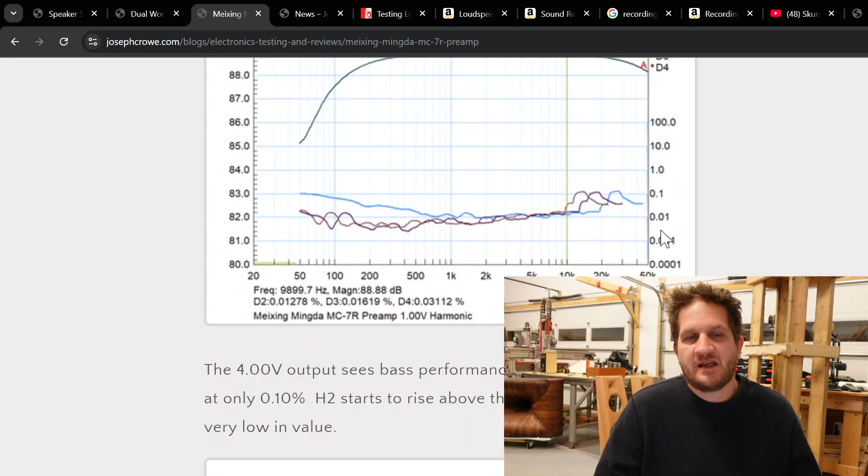And so the recent blog post that I had done was on the Meixing Mingda MC-7R preamp. And so if you scroll through the measurements, you'll note that there really isn't any predominant second order harmonic distortion until you get into the higher outputs, where you see that coming in with the bass frequencies. But generally, this amplifier is a very low distortion, very clean preamplifier, and it doesn't add any of that tube warmth from what I observed with the listening impressions.

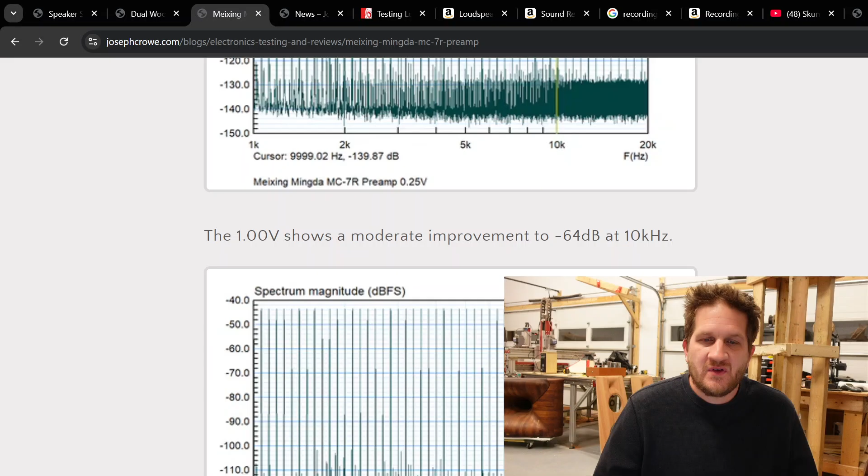Now in this blog post, if you scroll down, you can see where I actually directly compared the distortion measurements with the Don Sachs preamp. And so this is a preamplifier where you actually do get a nice tube warmth added into the sound. And so to correlate that with the measurement side, this is the distortion profile of the Don Sachs preamp, and this is what I refer to as the ladder effect, where you have H2 and then H3 and then H4 as a stepping ladder, where subsequently the distortion is lower and lower as you go into the higher order harmonics.

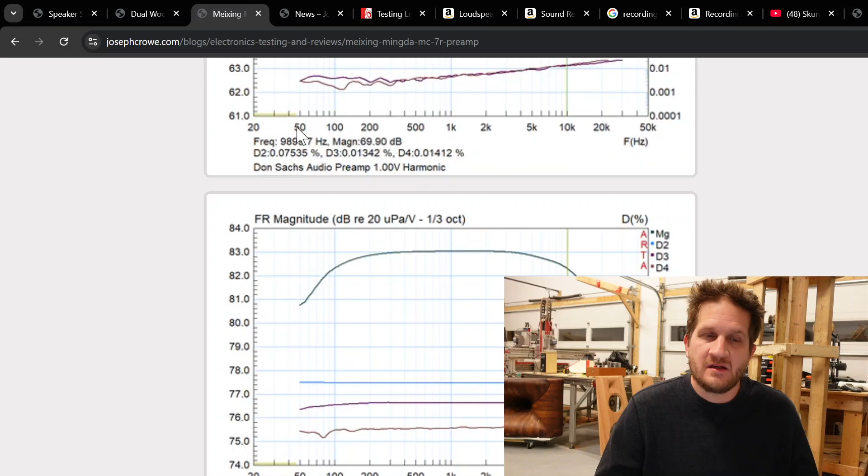Now this is an example of an electronic device that has that particular distortion characteristic, but it also holds true from my observation with loudspeakers as well. With driver testing, I've found that drivers that exhibit this characteristic also sound preferable. They have a nice, warm, rich sound, where it doesn't detract from clarity either. So often the concern is that when you introduce distortion, you're affecting clarity. It's been my observation that when you're focusing on this ladder effect, where you have the H2 predominant, then clarity does not suffer in any way. It actually ties the music together and has a much more musical sound character.

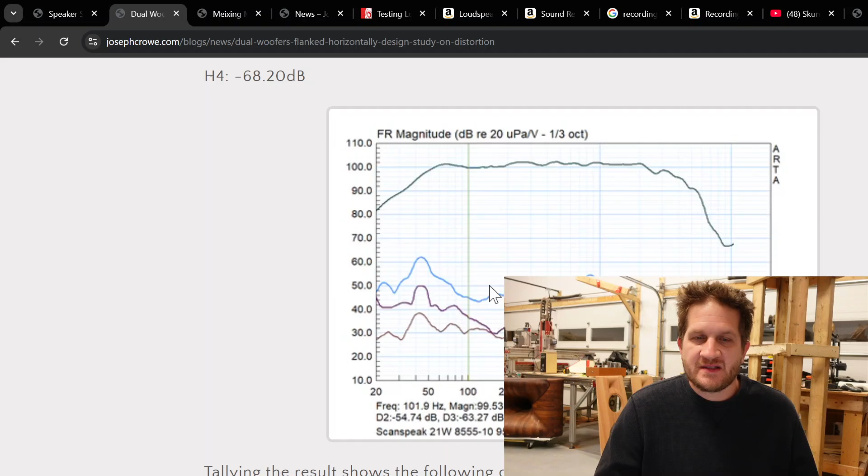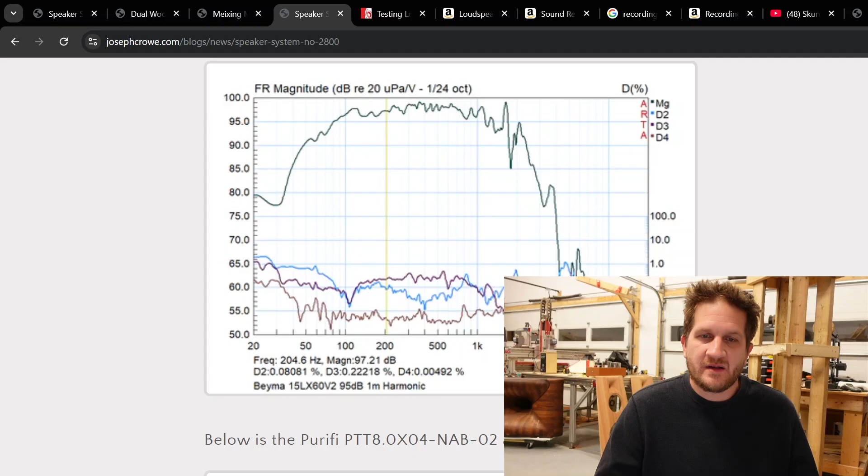To follow the line of thought with the speaker driver testing, you can see here in this particular blog post where I had done the dual flanked woofers, you'll notice again that it has the same ladder effect. And this is with the ScanSpeak woofer that has the symmetrical drive 1 motor technology, the SD1 motor technology. And you can see here again the same attribute. To further emphasize that, in the blog post with the measurements of the dual CS woofers, if you scroll down to the bottom again, you have that ladder effect in the distortion profile. So you can see that here as well.

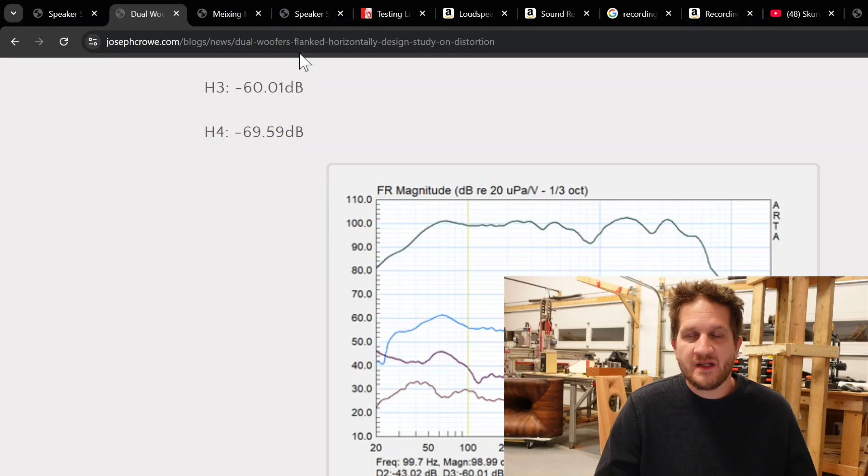So that's covering that question. Now I wanted to go back and discuss, when we did the live last, we were talking about various books that I've read and use, that have influenced me as far as my understanding and knowledge. And so I'm going to touch on that a bit as well.

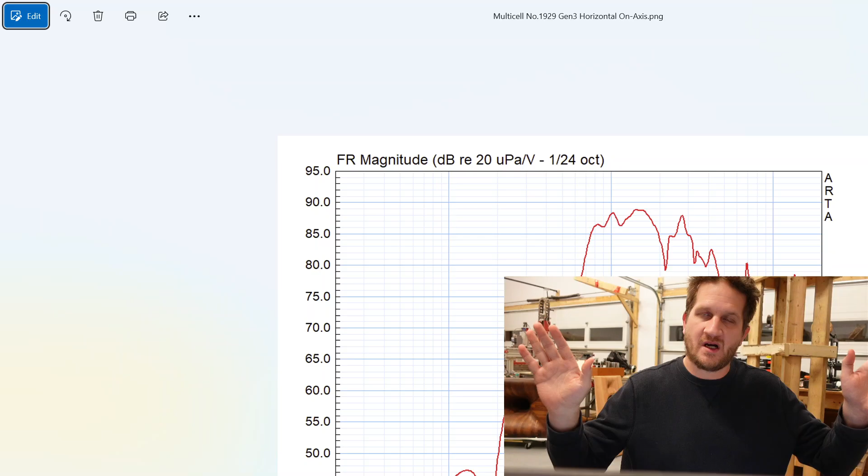Here's the on-axis raw frequency response for the 1929 Gen 3 multi-cell. You can see here, loading at the cutoff of the horn is generally around 700 hertz. And then you see a falling response, which is typical of the wide coverage type of horn. You're going to get less energy directly on axis, and that energy is being distributed off axis, which is why you're seeing this falling response.

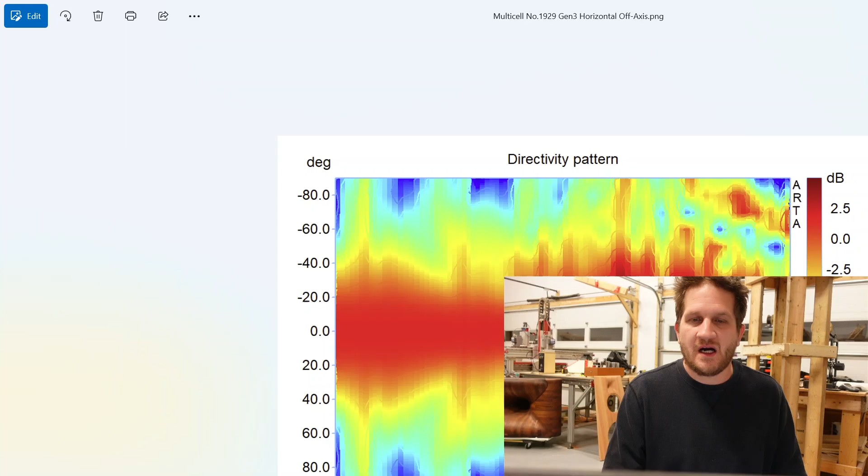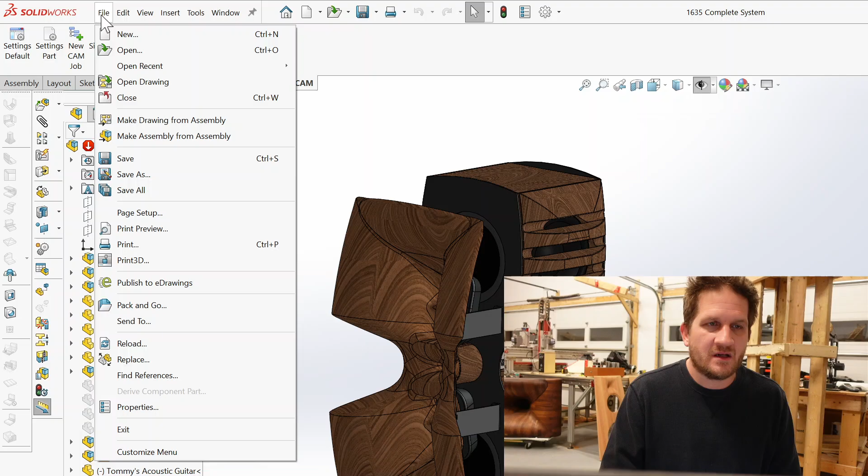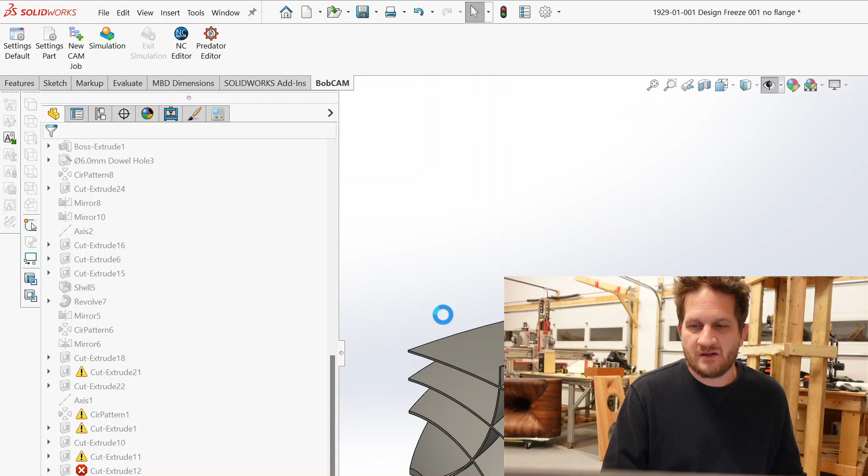I believe it's here. And so let me just suppress these two mirror features because I'll get to that in a second. So SolidWorks is gonna chunk away here. Oh, I think I gotta bring it back up. I might have destroyed my model.

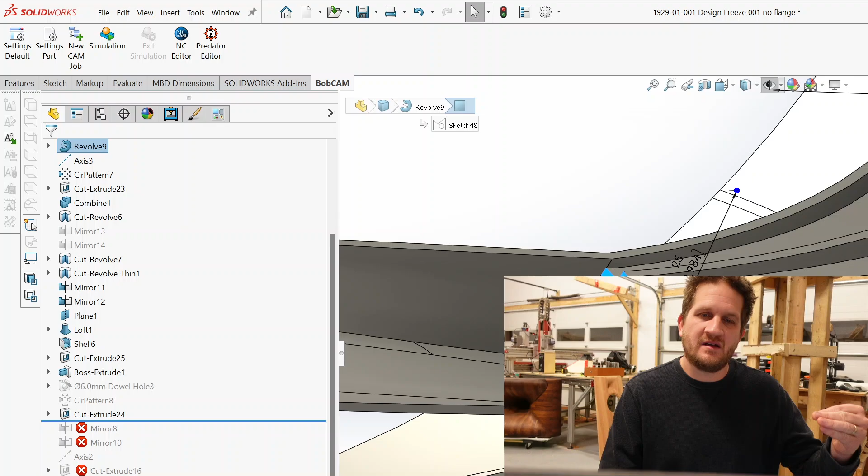So the point of bringing this up is that you can see here, this is with the kind of the potato masher, and there's a lot to be improved in this area. And so we can 3D print this to be even sharper so that there's going to be less reflection, first order reflections back down the throat.

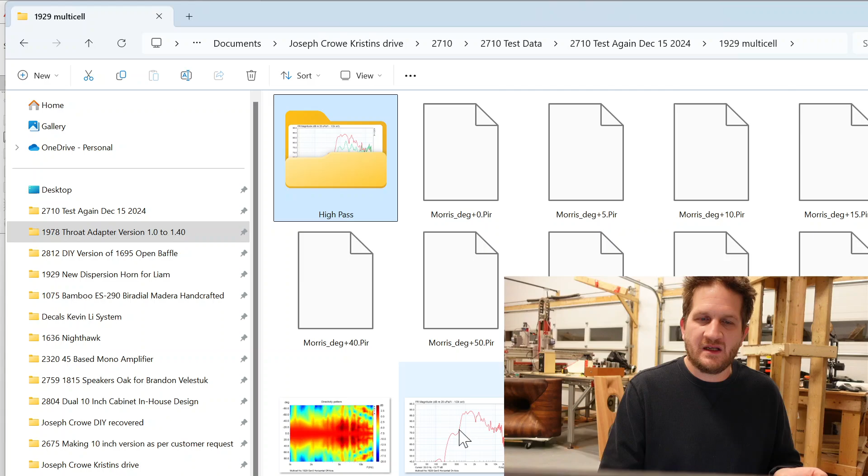And so the result that I'm seeing here is promising in the sense that it's free of anything severe as far as deep frequency response notches. So to me, subjectively and with the measurements, we've achieved the design target. And so from here, it's simply improving it further by finessing the design with small changes.

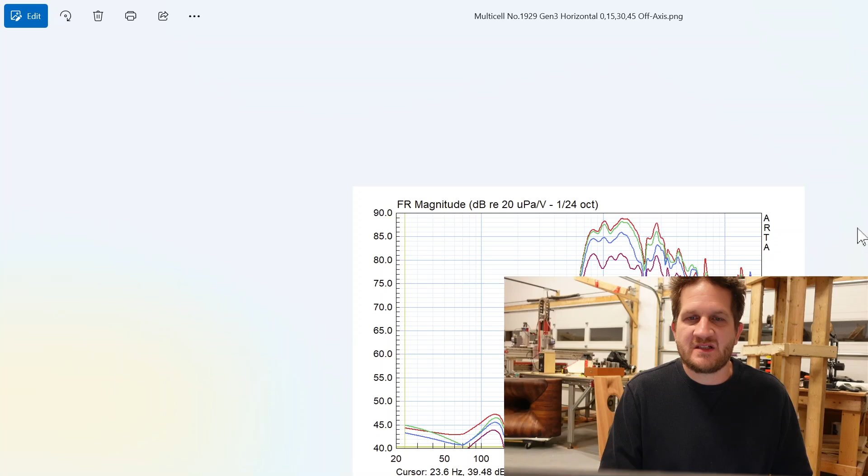Okay, so that's another frequency response measurement that I can show you. This is the 0, 15, 30, and 45 degrees off axis. So this is another measurement that I typically show. You can see here that it's fairly consistent and it doesn't change too much as you move off axis, which is nice to see. Again, this is with the 50 dB vertical and 1/24 octave smoothing.

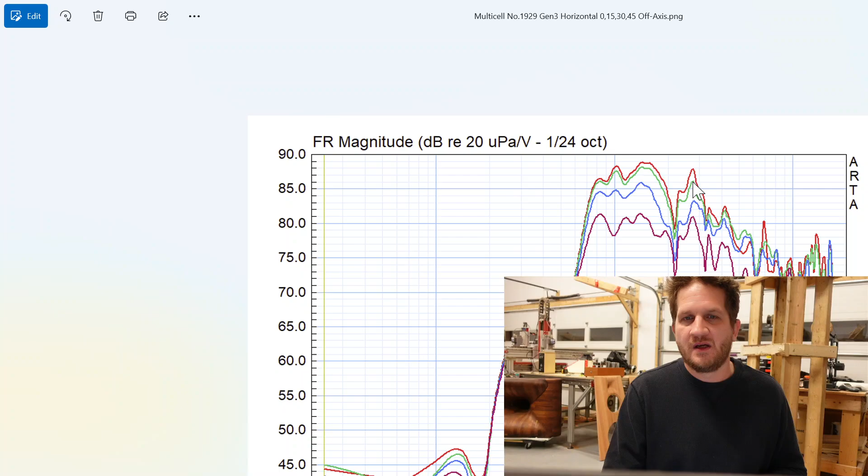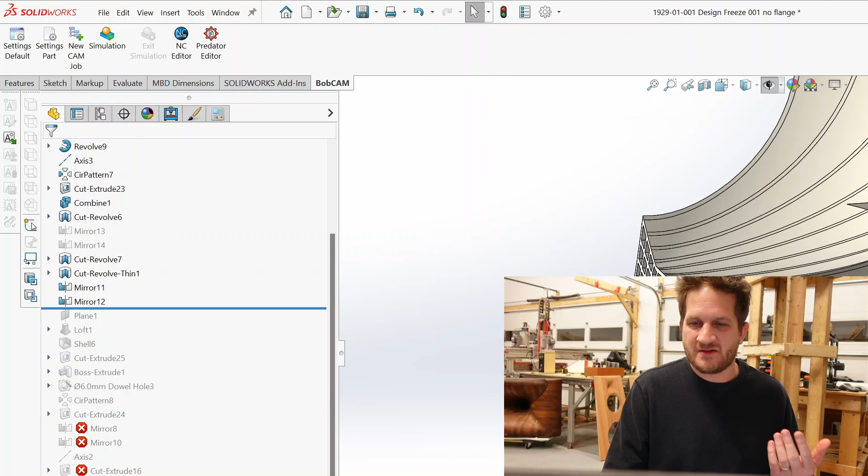So another area that I wanted to cover, actually, the multi-cell has a number of... Okay, here it is there. It's just a little bit slow because I'm recording and trying to do SolidWorks at the same time. So this is what I wanted to show you, just with how everything concentrates into a single area.

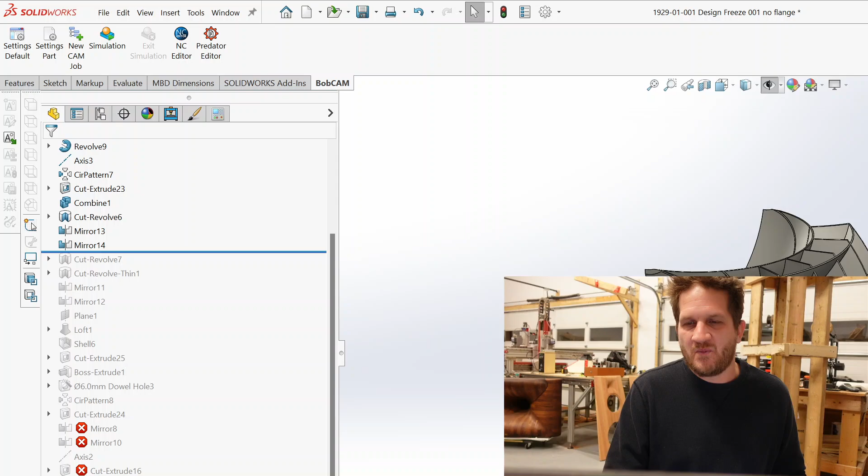But if I move back, one of the discoveries that I made while modeling it is that you can actually make it look pretty cool; this is kind of earlier in the feature tree in SolidWorks. So this cell is kind of the outer cell that's creating sound at that kind of 60 degrees off axis. But then it just continues with this design motif.

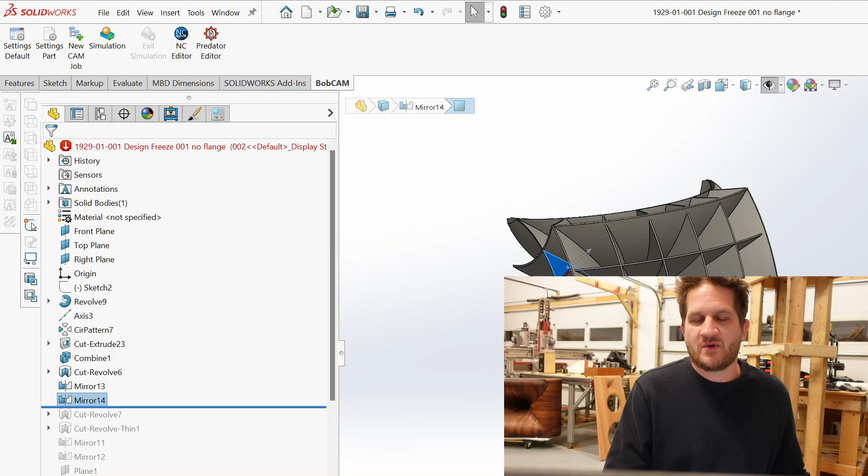And so it was just one of those things where as I'm modeling, I'm looking at it and thinking, man, that looks cool. That it would just look amazing sitting on top of a speaker. And if this was cast bronze with like a patina to it, I think it would look quite incredible.

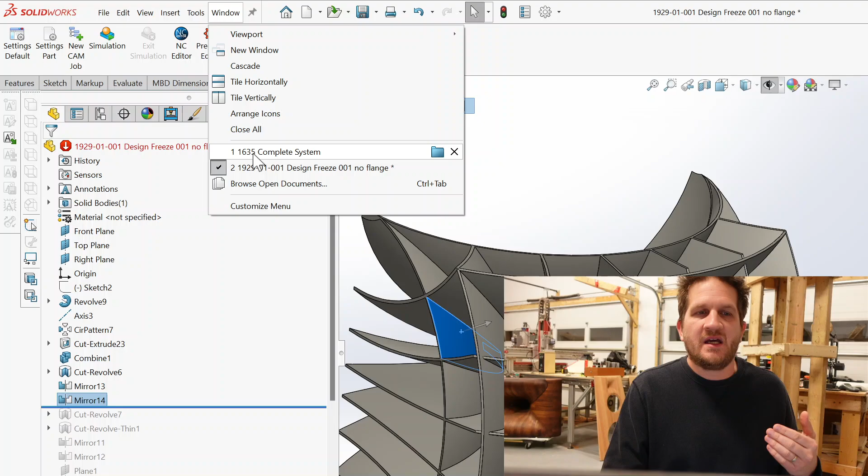So the other, and sorry to be wandering all over, but this, like I mentioned, is from a live that we did where we were answering questions. And so the Nighthawk is a project that we're going to be starting a build for a customer. And so this would be, I believe, Gen 4. I said Gen 3 in the live stream, but this is actually Gen 4, the fourth iteration of the Nighthawk.

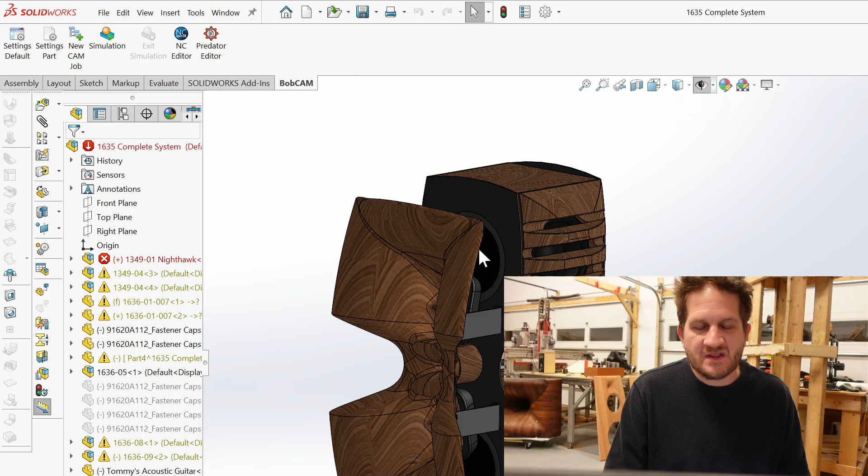And so the big distinction with this latest gen is the change from slot loaded open baffle, or SLOB. It was using 15-inch open baffle woofers, and with this latest version we're using bass reflex. The bass drivers, it's just going to take a second there, I just clicked on it, are the Dayton Audio RSS 315 high output subwoofer, and on the sides are the matching passive radiators, and then they just vent through these solid hardwood CNC machined vents.

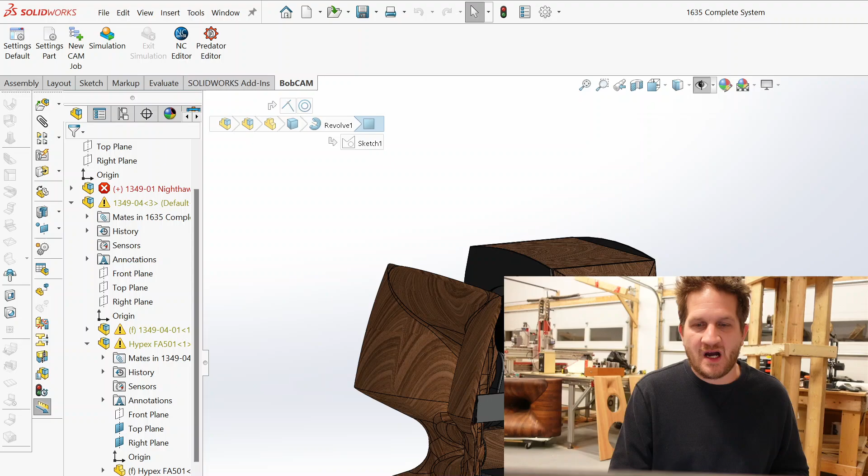And so there's a lower and an upper bass module that are basically identical. They're going to play up to around 120 hertz. And on the back, not shown but concealed completely inside the speaker, is the Hypex FA 501 plate amp, which with a 4 ohm load produces 500 watts. So with the 2 amps, it's going to be 1,000 watts per side. And that's just for the bass.

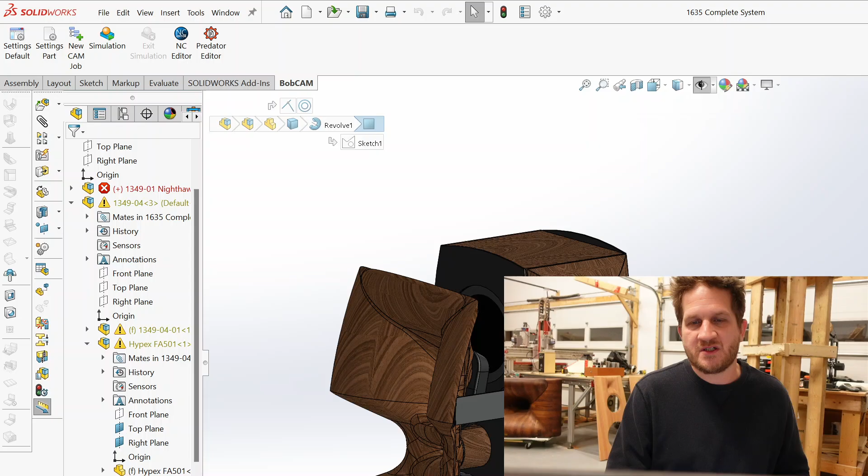And so this version of Nighthawk is going to be active on the bass only, and then passive for the mid and high frequency. The high frequency has changed from the pure ribbon tweeter from Viawave to a 1-inch compression driver. And so the crossover is going to be housed in this central tube. The crossover is extremely simple, and so it allows us to fit it in that small physical space.

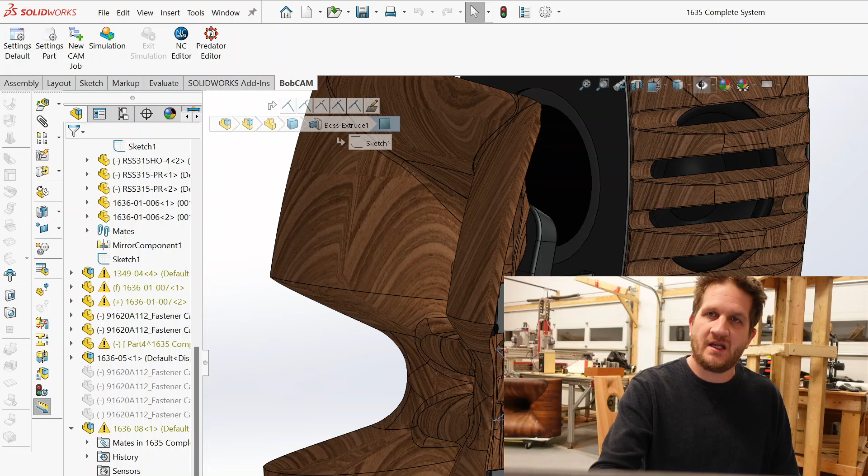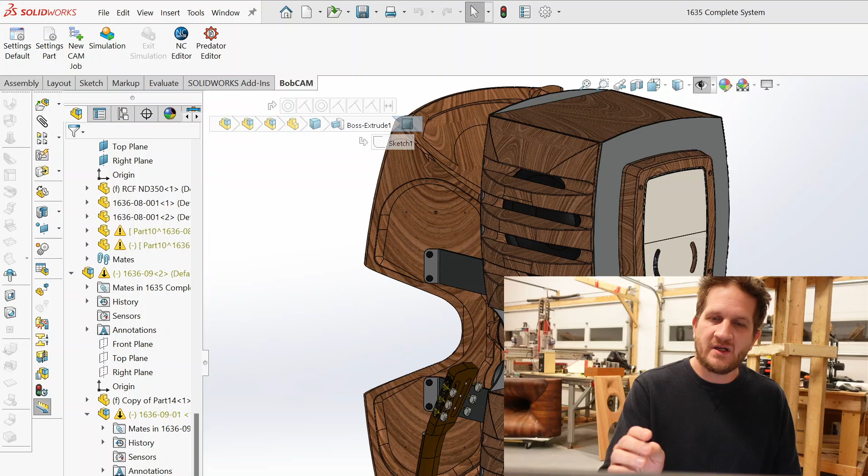So the other design element is this rear cover that conceals the wiring. And then if you don't know the Hypex amp that we're using, it has preset programs. You remove these covers and it allows access to the back of the plate amp. We're going to do presets for various DSP settings for the customer. So there's an upper and lower plate amp that you can access, and there's also the volume knob of the bass, the overall level of the bass that can be adjusted.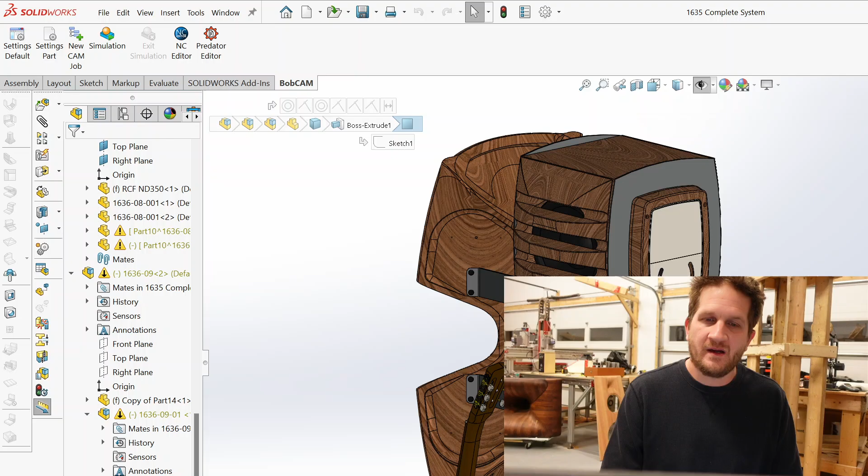Okay, and so for this particular order, I am traveling and doing an on-site setup where I'm going to use my microphone to calibrate according to the room and do full DSP and EQ correction based on the customer's room. So I'll spend a day or two listening to music, measurement, and then consulting with the customer on overall listening impressions and preferences, and adjusting for, for example, age-related hearing loss, and whether there needs to be a slight increase in the upper treble to compensate for that. So that's the last leg in getting what I would consider the ultimate: consulting on site with the customer to get to that level of listening preference.

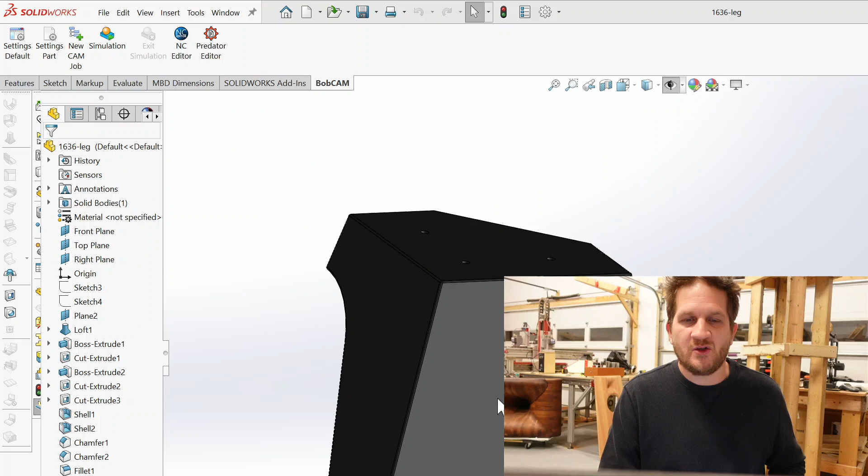Okay, so just continuing on with the design changes, these legs in the previous design were bent 3/16 thick or 4.7 millimeter thick mild steel which continued down, and then it had screws at the front that secured it to the base plinth. This design has changed in that it uses cast aluminum legs, so the 4 legs are the same, and it uses a 10 millimeter wall, and you can see it's very substantial looking. I think it really suits the overall aesthetic of the speaker, and it has a beefy masculine look to it. So that's where we're at. We're almost finished, kind of signing off on the design, and then we'll be starting on the build, which is going to take 2 or 3 months.

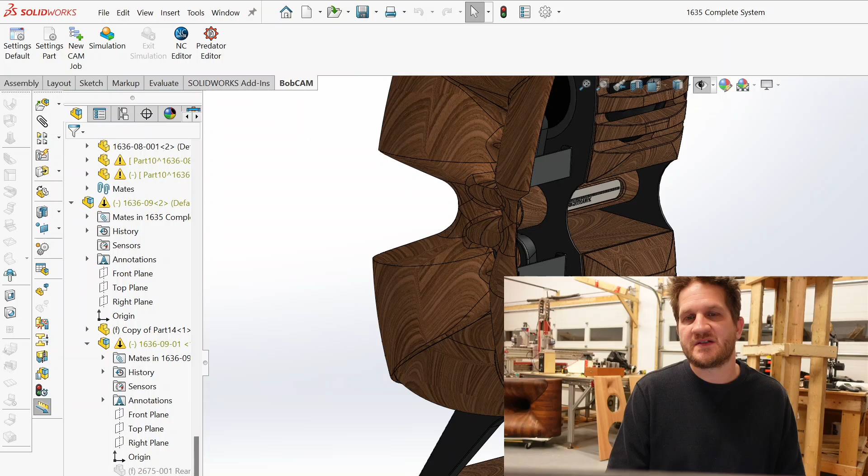So that's it for that. Let me just make sure I've covered off.

I was asked about what my favorite drivers are, either full range or compression drivers. For those of you that have been following for quite a while, you'll know the B&C DCM 50 driver. I've mentioned it just recently, and it's a great driver, but I won't get too much into that because you've already heard that. Another compression driver that's really good is the SB Audience 65 CDNT, a titanium compression driver with a 2.5-inch voice coil, and we use that even on the open baffle speakers that you can see there, and that's generally known to those that have been following my channel.

But outside of that, and in particular when it comes to affordable drivers, perhaps on the full range side, a couple drivers are worth mentioning. When I mention sound quality from drivers, it always has to be in the context of what horn it's being used with, because the combination of the two can really come together to make something truly special, and on its own, the driver actually could not sound that great. That's something I just want to preface before I get into this. So one that has really stood out, maybe underappreciated, never really took off as far as designs that I've introduced.

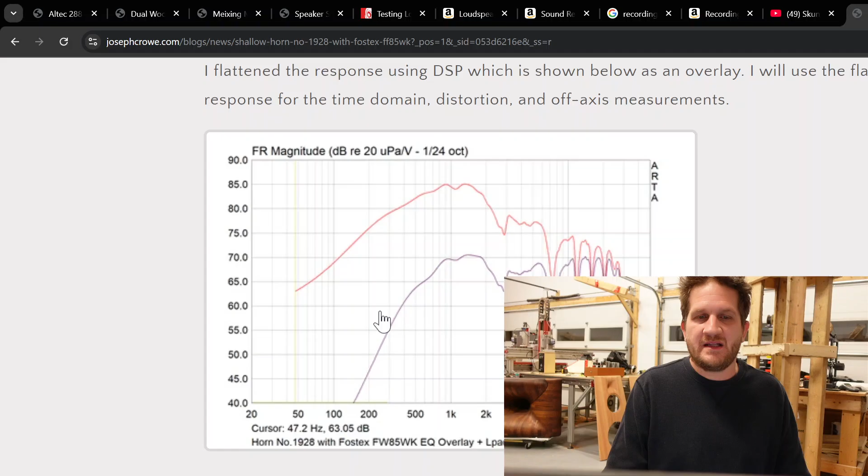You are covering 90% of the vocal range with basically what's point source, and so that's the clear advantage there. So this is a product that I think has been underappreciated. Now, the larger 3D printer that I bought, like I mentioned, has a 420 by 420 print bed, and this horn is 400 by 400 on the horn mouth. So if there is some interest there, if you want me to 3D print a version of this on the printer, then let me know.

Another driver that gets honorable mention in the category of affordable is the Fostex FE108NS. And again, just to emphasize, this driver on its own in a small bass reflex enclosure doesn't sound that great. But when you put it in this backloaded horn wide baffle, it just completely transforms the driver's sound quality. And so this is backloaded horn 2314. This is not on my site. It was just a test, an experiment that I had done.

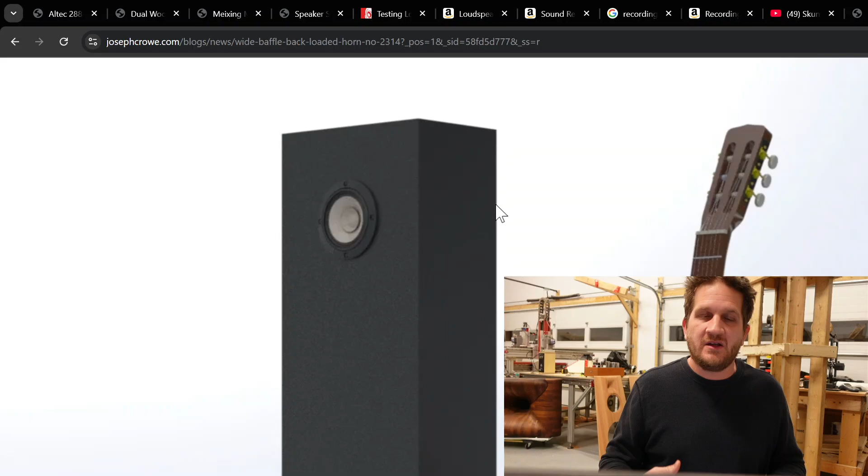I had used them in my listening room for quite a while. I don't even have these cabinets anymore. I had lent them to a customer as a stand-in while he waited for his other speakers, and the customer loved them so much that he ended up buying them off of me. So we plan on actually remaking these, even if they're just prototype enclosures, because I personally miss them. I want them back, to occasionally put into my system and listen to. So that's another one. And I think I might just offer this on my site as a plan set that you can download. It's a very simple and easy build.

Okay, so moving on from that, I was asked about the speakers behind me. Those are going to be assembled this week. It's the 1695 open baffle speaker. A customer is actually coming this Friday to pick them up, so we really got to get cracking on getting them finished. I just yesterday finished them on the CNC. Those are solid cherry, and they're going to get the Rubio finish. And then the other project there, you can see it there. That's the

2118 mid bass horn. And so I can talk about that a little bit. This is a design and build commission for a customer in Los Angeles. It's using this 10-inch 18 Sound driver. You can see it here. Now, I had used this driver in a previous blog post where I had mounted it into a 200 hertz horn, and I just face mounted it into the horn. I didn't have a phase plug or anything like that, and it produced very low distortion and had great immediacy and dynamics in that 200 up to 1 kilohertz frequency range.